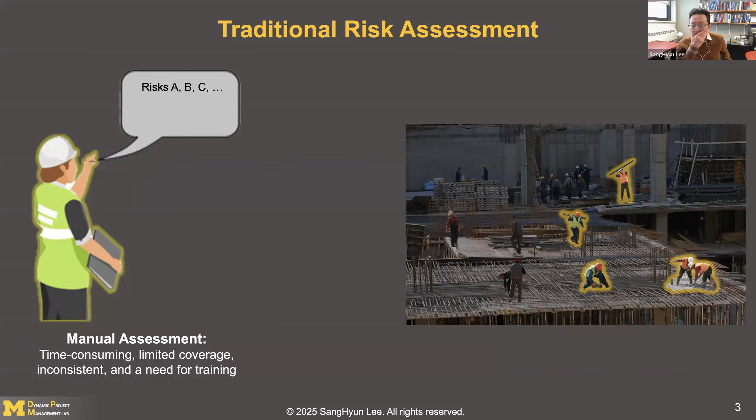So what AI can do here is, of course, deal with the time consumption. It has wide coverage, and it is consistent. I'm not going to say it is error-free, but it is more consistent. Also, once we train the model, we don't need any subsequent training, so there is no need for training down the road.

So AI has emerged in risk assessment, and we see that it has become very popular nowadays on the job site. One of the main drivers for AI-assisted assessment is that we have continuous data. We can have cameras and wearable sensors, so now we are able to have continuous data from the job site. That is one of the major drivers of AI adoption, because if you want to do job site analysis, basically we need the data.

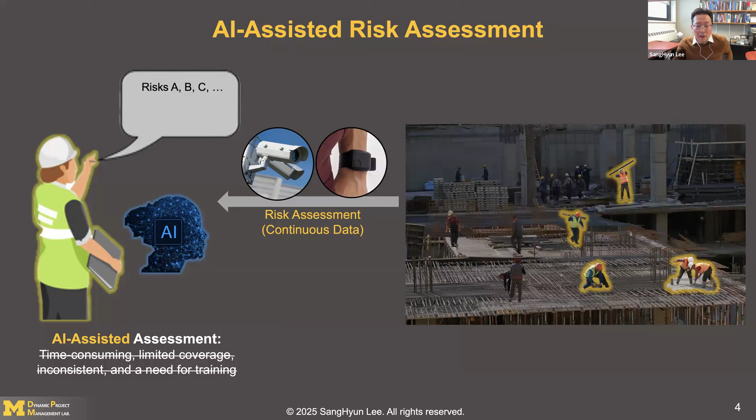Nowadays, I also see that AI has great potential even for intervention recommendations. So we can do risk assessment and we can get assistance from AI with the risk assessment. And we can also have AI's potential recommendations. So we as professionals can focus only on what-if analysis, basically the decision-making process.

So that is the general story about AI-assisted risk assessment and intervention. I found that it has great potential to reduce all the risks in the workplace, and that's what I have been studying and translating to practice. Having said that, let's talk about my first application, musculoskeletal risk with the camera. In particular, I'm going to talk about the smartphone, because most of us now have a smartphone.

I'm not going to talk a lot about the significance of musculoskeletal disorders in the United States, but we all know that, for example, 30% of the incidents and injuries in construction, particularly days away from work, are because of work-related musculoskeletal disorders, MSD. And in terms of workers' compensation, MSD risk costs more than $34 billion per year. So it is a very important issue on job sites.

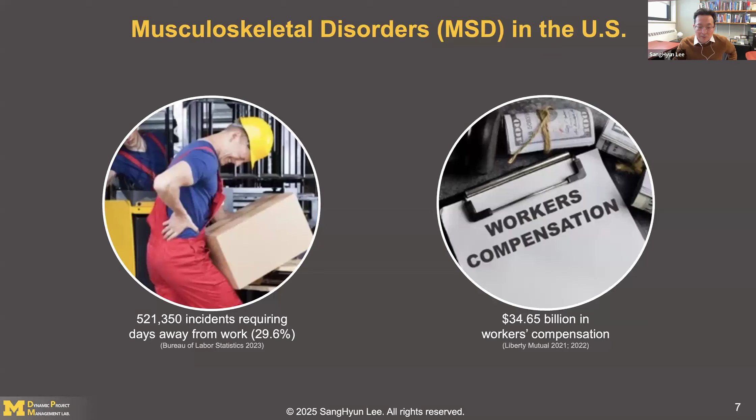If we look at risk assessment and MSD risk evaluation, basically what we are trying to do is understand postures, particularly joint angles. Joint angles, for example, to what extent I bend my back, mean the severity of the posture. So we focus on joint angles, basically postures, and then it goes to typical observation methods like REBA, RULA, OWAS, the NIOSH lifting equation, or the Snook table. That is what we have been using for MSD risk evaluation.

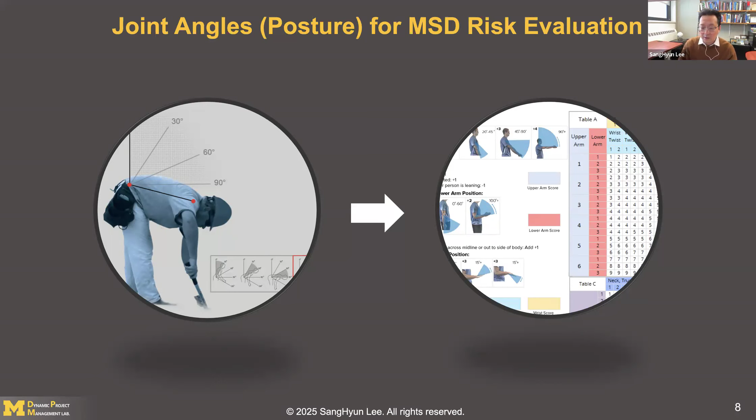In 2016, I saw great potential, and I have proven that computer vision based, sensorless motion capture, only using, for example, a smartphone, has great potential, particularly to automate joint angle calculation. That is the biggest bottleneck in risk evaluation. So I founded a company called Kinetica Labs, and we pioneered and commercialized it.

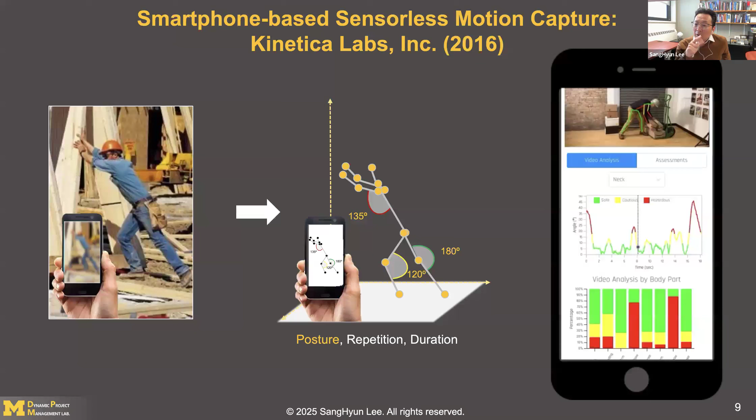The idea is using computer vision pose estimation, we collect the body angles, basically the severity of the posture, then we can automatically identify repetition, how frequently we observe the posture, and then duration, how long. Then it can be connected to the typical observation-based methods. This is an app that we developed almost 10 years ago. You can see that it is connected to continuous body angle calculations for each body joint, and then it connects with REBA and RULA so that we can have risk assessment.

Ten years ago, we introduced 2D, but we are living in a 3D world, and we definitely need 3D human motion data for risk assessment. There are two particular reasons we need 3D. The first one is that depending on the viewpoint, your body angle estimation would be much different. The angles that you see, depending on the viewpoint, could be from 0 to 180 degrees. So we advise professionals to maintain a very clear line of sight and a very specific range of view, but that is not always allowed on the job site because of workplace constraints. So we need to deal with it, meaning that we need 3D.

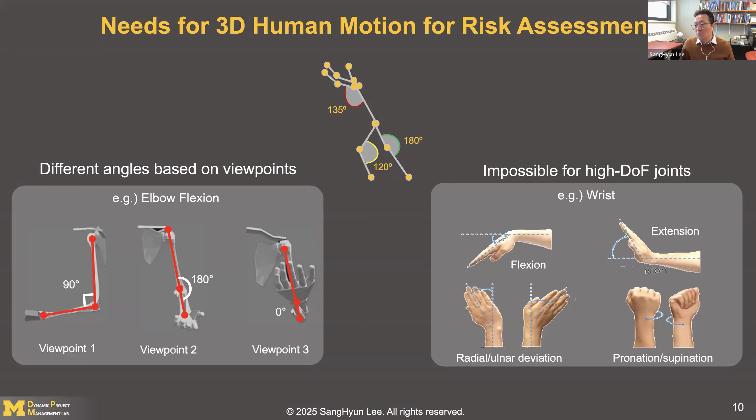Another thing we noticed is that it's almost impossible for high degree of freedom joints, for example, the wrist. If we calculate the joint angles of the wrist, it can have flexion, extension, and pronation. But with 2D, it is just impossible, right? High degree of freedom joints are the wrist, neck, and shoulder, and those are almost impossible with 2D. So we wanted to develop 3D posture estimation.

If we want to do artificial intelligence, we need a 3D data set. There are some widely available 3D data sets for AI model training, and one of the most well-known is the Human3.6M data set. But the problem with those existing data sets, particularly for ergonomic MSD risk assessment, is that they have insufficient 3D key points. Human3.6M only has 17 effective joints, which is not sufficient to calculate all the body angles needed for MSD risk evaluation. So we used our Vicon and RGB cameras, and proposed 66 key points to address those issues.

So we need to select the 3D key points. The first one is we need to have sufficient 3D key points, right? We need to calculate all the flexion, deviation, and pronation. So we need sufficient 3D key points to calculate all the body angles. And another thing is we need to have visibility.

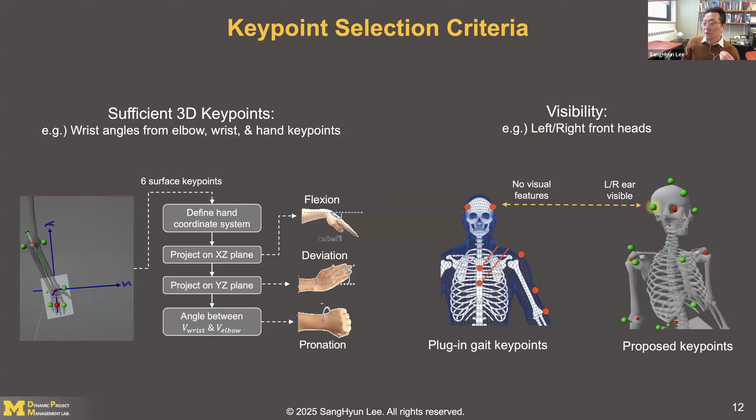Then we collected 3D data from 20 subjects with diverse height and weight, so that we have diverse BMI. We particularly focused on manual material handling and assembly tasks, for example, poke, push and pull, and assembly overhead. To have motion variability, we asked each subject to repeat the same task as much as they can for 3 minutes. So even though we say assemble overhead, it can have more variation, so we have a lot of variation in the data set.

As a result, our data set has more than 5,000 task variations, more than 1.8 million distinct frames, and a total of 6.7 million frames.

Once you have this 3D motion data set, we use our computing pipeline to do 3D pose estimation. First is 2D pose estimation. Once we have a 2D skeleton, we do 3D pose estimation basically using 2D-to-3D lifting. Then we are able to have all the possible body joints, 22 angles in 6 joints, which is ready for all the possible ergonomic MSD risk evaluation.

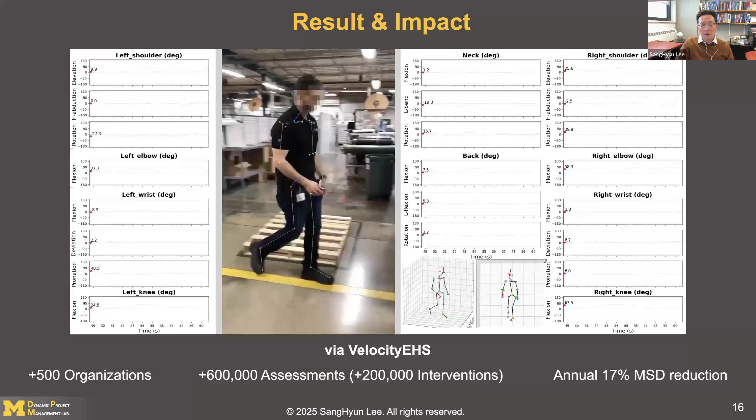So this is the demonstration of the body angle calculation coming from the 3D pose estimation in real workplaces. You can see the 3D skeleton and all the possible body angles shown here.

That has been translated into practice by VelocityEHS. Now it has been used by more than 500 organizations, and 600,000 assessments have been made, which resulted in more than 200,000 interventions. So we are achieving a year-over-year 17% MSD reduction.

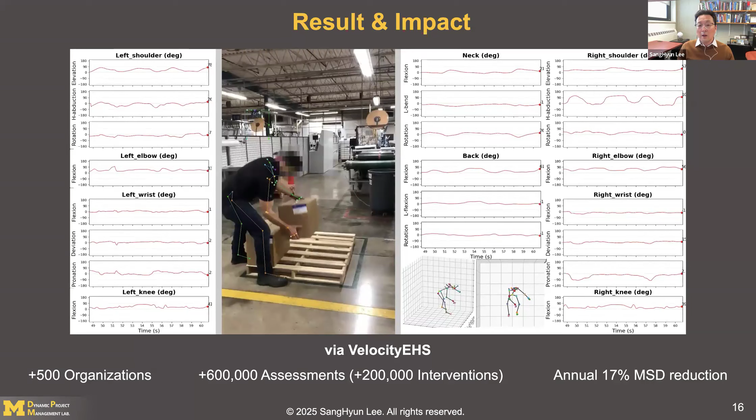One thing that I would like to highlight: I talked about manual evaluation. It is very hard to achieve wide coverage of risk assessment that way, but this vision-based, smartphone-based MSD risk evaluation really democratized the use of MSD risk evaluation, so you can see a significant number can be done with just a smartphone.

What we have been working on is, it is great to have posture, repetition and duration, but if you want to do, for example, biomechanical analysis, we need external forces. So we have been working on using only a smartphone to estimate the forces. We have a 3D skeleton, a simplified 3D skeleton, and we developed our own force estimation model, composed of kinematic modeling, basically changing to a rigid body, then physics-guided inertial force reconstruction, and then optimization.

So if we have a 3D skeleton, we predict the external force. In this case, the red one is our estimation, and green and blue are ground truths. Blue has a Gaussian filter applied because there is inherent noise in the force sensor. We can see that it closely follows the trajectories of the ground truth external forces, which can open the door for biomechanical analysis. That's what we also have been working on.

So far, I have been more talking about risk assessment. Now let's see the potential of the AI for the intervention. This is an ongoing work, so I'm going to briefly introduce also what we have done for intervention recommendations, interventions using the AI.

So again, if we have a smartphone, we have video, then we have a 3D pose, and also we can use the external force estimation that I introduced, or you can just put it in, then basically we can use the 3D SSPP for biomechanical analysis, or just using the 3D pose, we can do a RULA/REBA ergonomic risk evaluation.

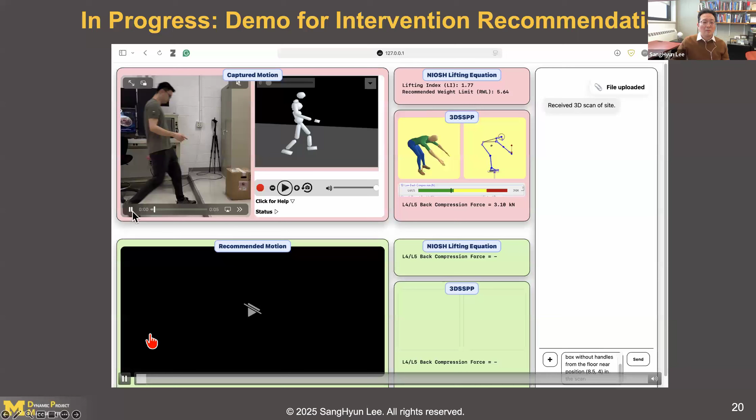So let me show a quick demo. So basically what you can see here is we have the real work and then the pose estimated, and then that is showing in our physics-based simulation. Right. Sorry for this. And then we can also see the score, the 3D SSPP or NIOSH lifting equation score.

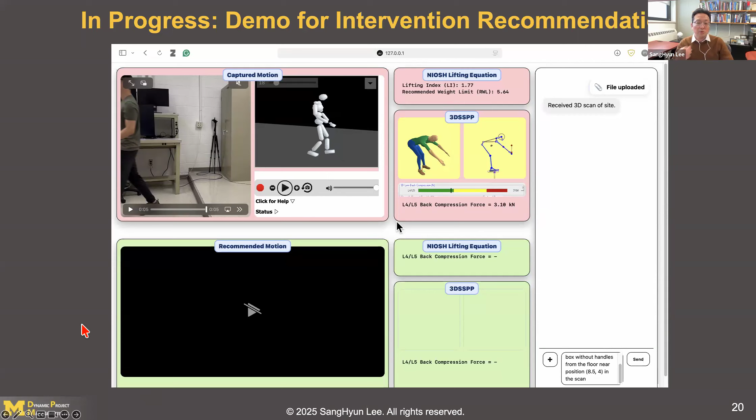And then what we can do is we can import the site scan as well as the task description. So we can do the site scan of the real world, and then we can see how workers can improve their postures. For example, here, in the previous one, the real one, what the worker has done is basically stoop, and it is reaching their arms and hands to pick up the boxes.

But if you can see here, actually the worker is trying to use the squat, and one leg is actually stepped over onto the step so that it can have a much more ergonomically safe posture. And then we can see their impact on the 3D SSPP or NIOSH lifting equation. So meaning that the AI can generate, okay, I understand that this is a real situation, what kind of postures can fit in this real environment?

What could be improved? Or if we see that there is no way to improve the ergonomic score, the MSD risk evaluation, then we can simply change the job task description, and then we can try with the redesign of the workplaces, and see what is going to be the impact before actual implementation in the job site. So it is one way that shows that AI can actually help intervention recommendation, so we can decide what is going to be the best for our job places.

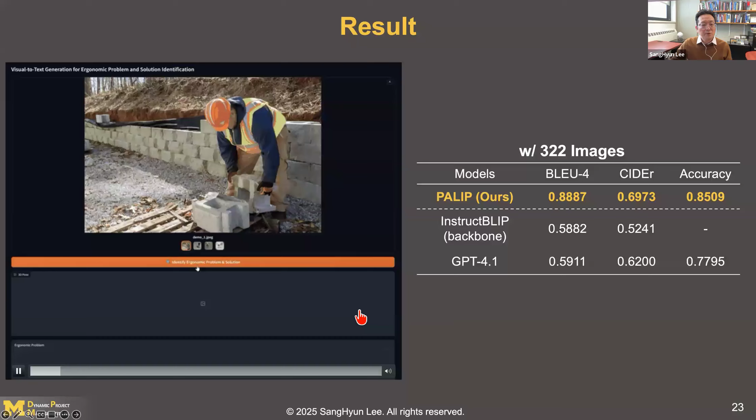If you see, we put the image here, and then it creates a 3D pose, and then it identifies what is a problem and the solution. So in this case, lifting heavy concrete block with a bent back can cause back pain, and then the solution is use lightweight concrete block. So our accuracy, this one is ours, accuracy is almost 85%, which is greater than the typical generative AI out there.

So meaning now we can also get the kind of intervention recommendation just using a smartphone and see what could be done. So we are moving onto video now, because we would like to have much richer information, and also we can get continuous data from the video.

So far, I have been talking about MSDs with smartphone and computer vision. Now, let me talk about another application. Now, I want to talk about fall risk, this time using a wearable sensor, for example, a wristband. So falls are the most frequent and fatal source of injuries in construction, but also in our daily life, in our built environment, it is a very serious issue.

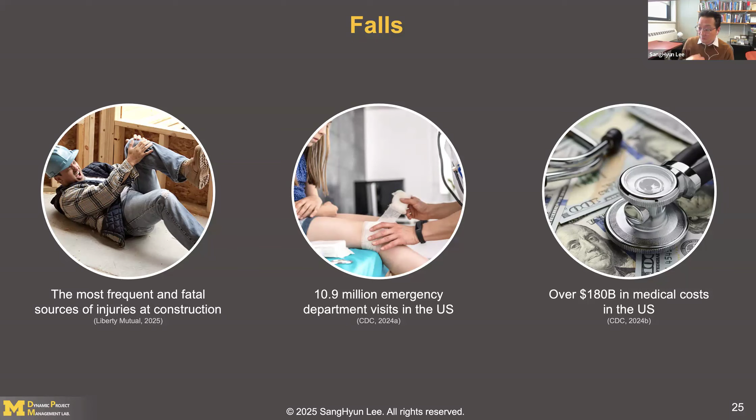10.9 million emergency visits in the US every year, and over $180 billion are spent in medical costs because of falls in the United States. So fall is a very serious issue. And this hazard, the slip, trip, and fall hazard, is not only in construction, but also other places.

It's everywhere. So what we try to do first is using the wearable sensor, in this case, an IMU, which measures the acceleration and which also has a gyroscope. So IMU-based STF hazard exposure detection in construction. So what we did is that we put the IMU sensor on the waist vertically. And then construction workers just walk around the site.

We basically identify abrupt movement, bending and jumping. And then we can use a threshold to identify abnormal patterns. So for example, specifically what we did is that we try to understand the gait features, extract the gait features. And then eventually what we would like to measure is gait variability.

If you have just regular, normal working, your gait variability is not going to be high. But if you have hazard exposure, your gait variability is going to be increased. That's what we are trying to capture by calculating gait variability with the Mahalanobis distance, and then training with the bidirectional LSTM, and then we see the difference between exposure to the hazard or just regular working.

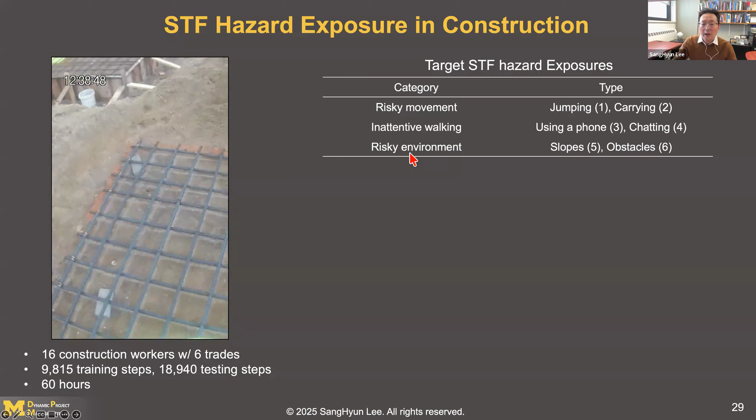So what we try to measure is our target STF hazard exposure, for example, risky movement, jumping and carrying, and inattentive walking, like using a phone and chatting while walking around the construction site, and then risky environments like slopes and obstacles. So our result, using the one that I introduced in the previous slide, the average accuracy is 94%, so it actually identifies STF hazards nicely.

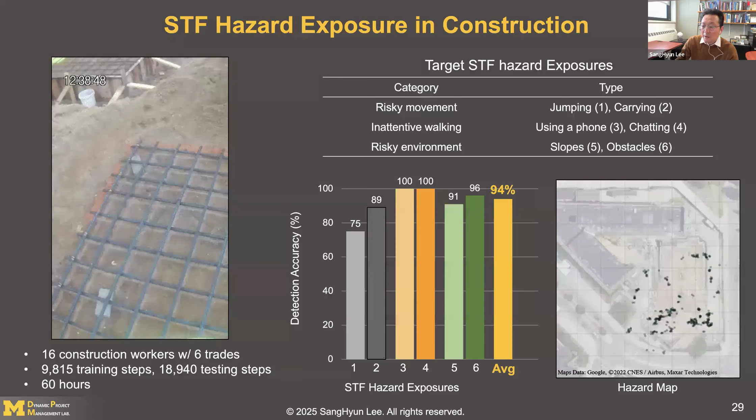So once we identify STF hazards in the construction site, we can actually map them as a kind of hazard map to show which area particularly has this hazard. Also, it can be simulated over time. As I introduced earlier, falls are everywhere. So now we would like to have wider applicability, particularly to apply it to our built environment.

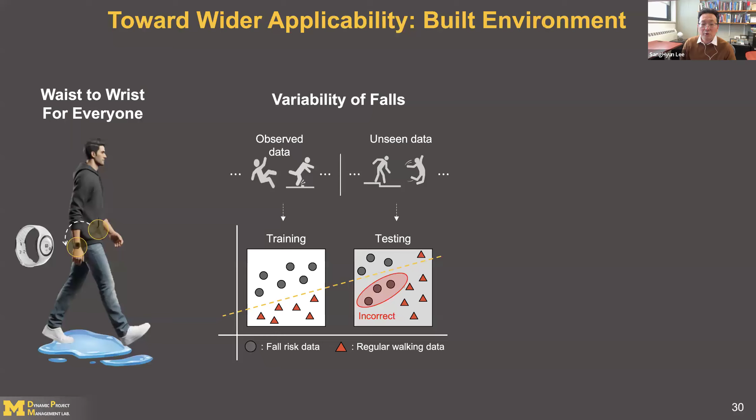To do so, the IMU sensor on the waist vertically may not be an ideal solution for normal people and everyday use. So we would like to move the sensor location from waist to wrist, using basically a typical smartwatch. And also, we would like to address the variability of falls, meaning that all different contexts exist in case of a fall. So trying to collect all the possible scenarios of falls and train the AI model would not be feasible. So we would like to address the variability of falls.

And another issue is that there is transitional motion, meaning that the abnormal motion patterns from exposure to fall hazards could be very similar to transitional motions like jumping, bending, and kneeling. So we need to differentiate such transitional motions to accurately identify the fall hazard.

So what we use first is the unsupervised graph-based approach, meaning it is a training-free approach. So you don't need any AI training, and then we just start collecting people's IMU data. We are going to identify the abnormality using the graph-based one.

Another one, particularly for transitional working, is that we used EDA, electrodermal activity, which measures the electrical conductance, a change in the electrical conductance in the skin. Many smartwatches nowadays have EDA, so we would like to use it to differentiate transitional working.

The way it works is that the EDA basically measures people's arousal. If you encounter a fall hazard, which is a stressful event, we hypothesize there will be an increase of the arousal. While transitional working is not stressful, it's your kind of intended working, so it doesn't show a lot of high arousal, which is what we use EDA to differentiate.

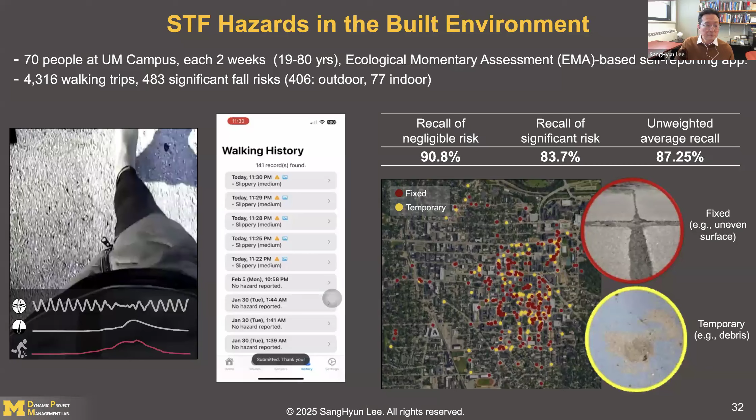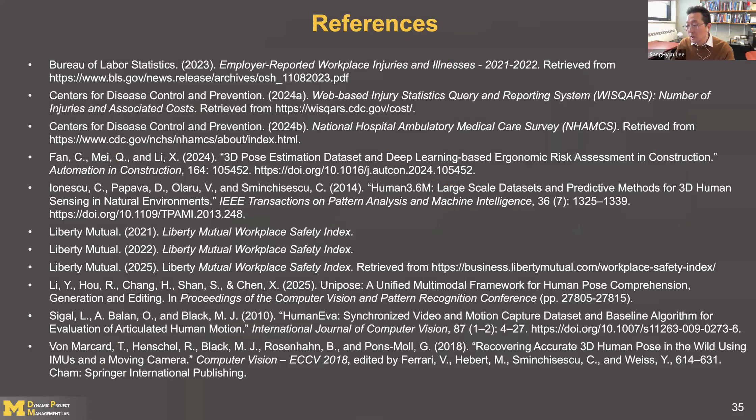Thank you so much, Professor Lee. Really appreciate it for a wonderful presentation. I think we learned a lot from your presentation. So I'll open the floor for any questions from the audience. I have some questions myself, but first let's see if there are any questions from the audience.

Thank you. By the way, I'm sorry, I don't know if you heard the noise—it was unexpected construction noise. Hopefully you didn't hear much, but there was a little bit. I would like to apologize for that.

Sure, okay. Thank you so much. Any questions from the audience?

Yibo Kiang is asking how is the market for the product now, for the software that you have developed? The one I developed from Kinetica Labs - Kinetica Labs was acquired by Velocity EHS. Now all the product has been distributed through Velocity EHS, so the tools are still available through them.